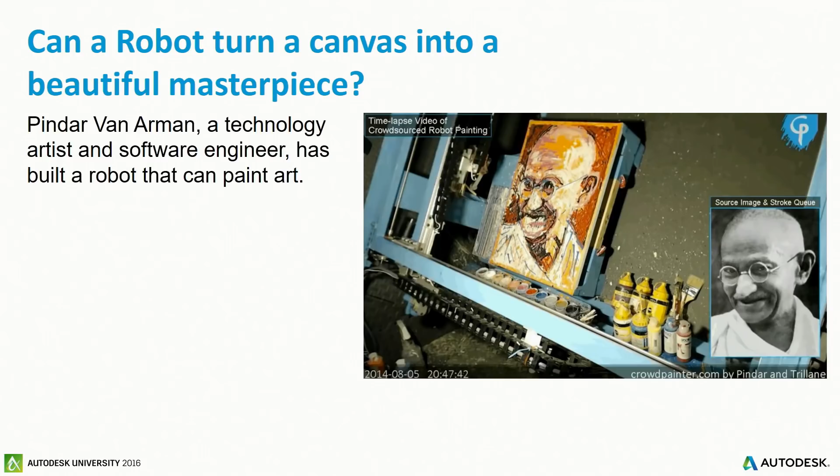So what I want to do, which hopefully you'll gain from this talk, is bridge the gap. I want to talk about where we've been, where we are, and where we're going. I'm not even going to go back into CAD—I'm just going to talk exclusively BIM.

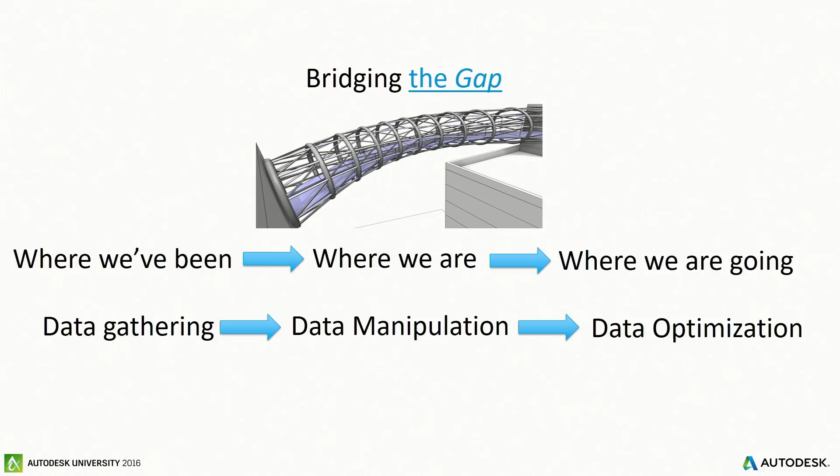So right now, where we've been is data gathering. Where we're at right now in this point in time is data manipulation. And where we're going to be going is data optimization. How do I know we're going there? It's already happening—there's already firms that are already starting to do this, the progressives, and it's just a few more years before it becomes mainstream.

So where have we been? Hunters and data gatherers—this is where largely our industry has been. Hunting, assessing the model, capturing data in schedules, kicking it out to Excel, manually remodeling it, going through this design iteration process with tools that I call static modeling. That's largely where we've been as a pulse in the industry. There's people doing more progressive things, but for the mainstream, that's pretty much where we're at.

So I can only design a few options within the timeline and budget allocated if I'm doing it as a human being. If I have to design a hospital and I'm given 4 to 6 weeks to do it for the design process, schematic design, I can only crank out so many options in that timeline through that process.

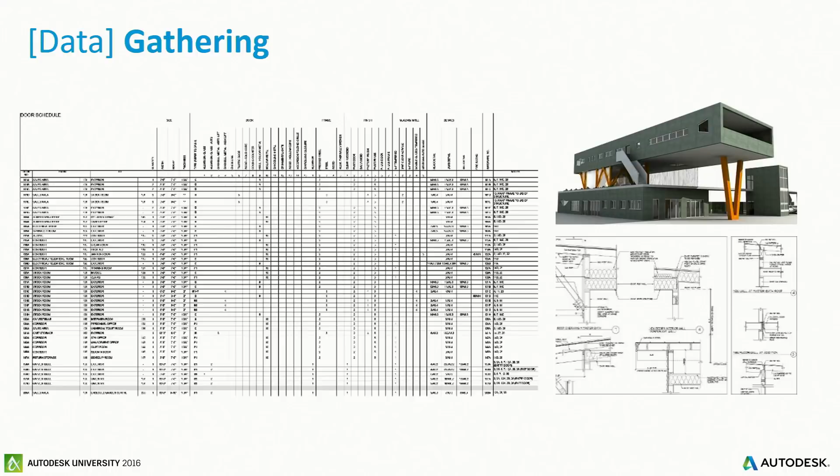As far as data gathering, we're mostly just grabbing the data from these models. Not to be cynical about some of the tools I'm seeing even today, but a lot of it is just in the cloud. It's like, well great, we're just repeating the same process of gathering data—now we're just doing it in the cloud, right?

So what I want to push is where I think we're going to be going, which I'll be talking about: static modeling versus parametricism and algorithmic modeling.

So we have a lot of these static modeling tools. This is one that we did in FormIt, and we started overlaying the idea of using Dynamo and Dynamo Studio, and some of those that you guys have been using with the FormIt.

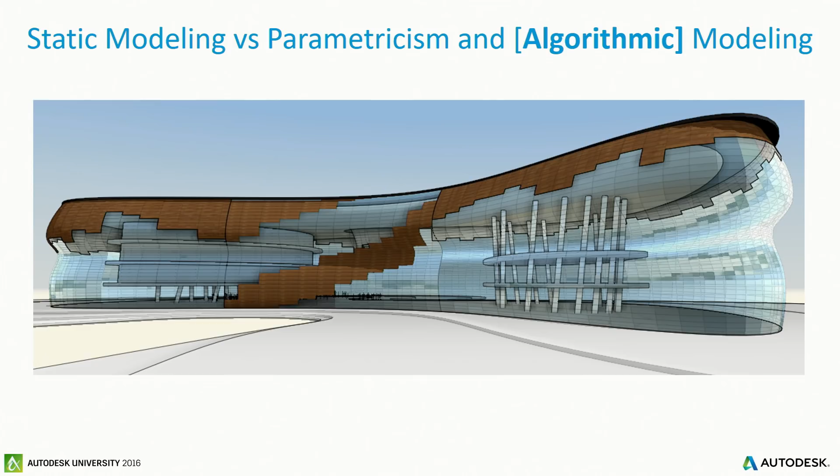The next step is what I'm calling co-creation, and maybe you guys have seen some of these too with some of the Redshift publications. This is basically the first—this is my own personal experience, a project I worked on, and the first hints of alluding to this co-creation process, or having data inform buildings.

In this one specifically, this was a Revit family that I had built, and I was using a bit of trigonometry, some formulas to rationalize these panels. The idea was trying to create these panels along a curved surface, and it was rational—all the same size—so that when we gave it to the fabricator, every piece, every panel was exactly the same size for efficiency of fabrication.

The challenge is it's rigid and not intuitive. I'm dealing with this formula that's not intuitive to edit or manipulate. The fact that I have to put trigonometry into the formula, or into the family itself, this is what leads to lack of adoption, in my opinion, in our industry, when you have to go through these hurdles.

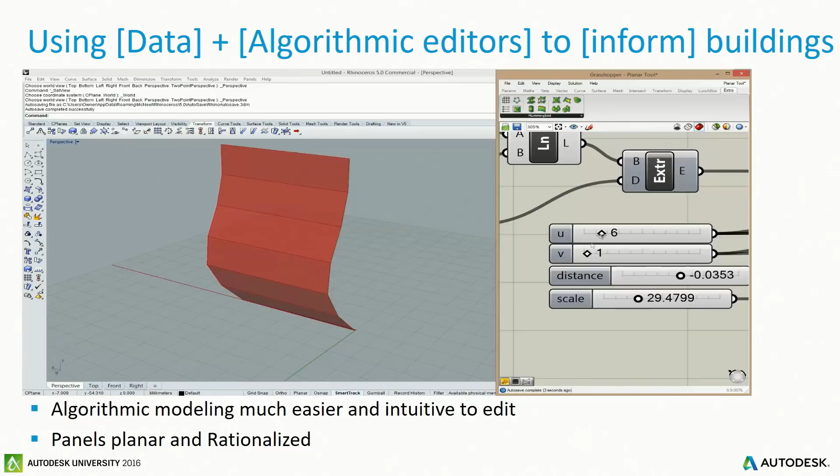The next example is doing the same thing, but when I started using algorithmic modeling with a tool like Grasshopper, I'm doing the exact same process, but using an algorithmic editor to rationalize the panels. You can see, very intuitive—I'm just moving the graph mappers, updating the geometry very intuitively, and not having to use any trigonometry. The program, in a sense, is doing that. So the intuitiveness helps with the adoption process.

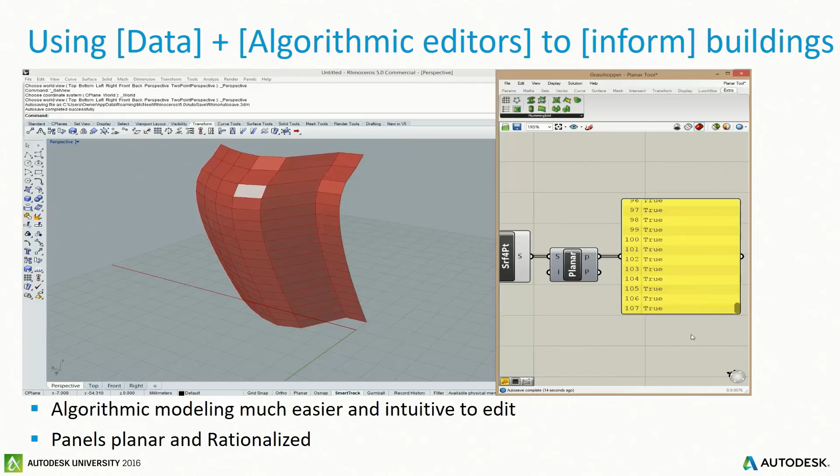The thing to note here is the panels are all planar. I'm doing a test to check: is this planar? Yes, true—every single one of these panels is 100% planar. It's very easy to get triangulated panels rationalized, but it's a much more difficult thing to do with squares and rectangles. So this is a good example of that—even with this intuitiveness, it's still 100% rational.

So Dynamo extends information modeling with a data and logic environment of a graphical algorithm editor. Many of you guys are already using Dynamo and understand this. It's basically just logic, hook up the nodes, accomplish what you want to do.

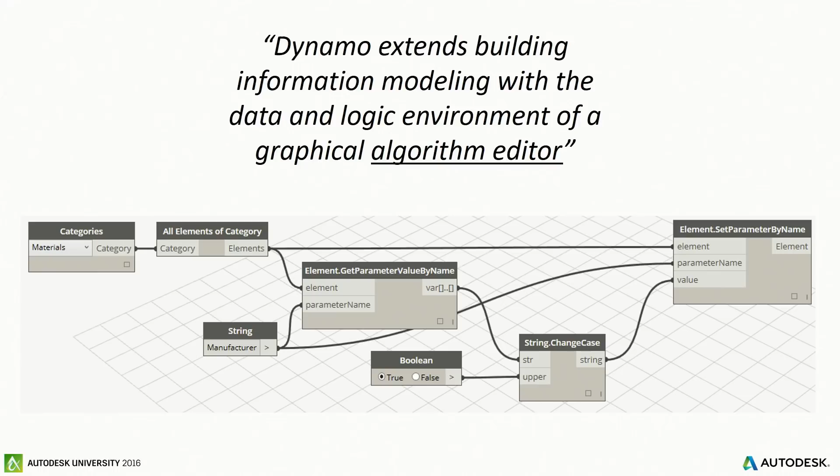So this next example is one that I did for BOMA calcs. I don't know if any of you guys have had to do BOMA. You cannot do it in Revit. Natively, it is impossible to do it in Revit. So the age we're in is the tool building age. If a tool does not exist and I can't do it in the program, I'm going to write a tool that can. Autodesk gives tools to us like Dynamo to overcome some of those challenges and limitations.

The running joke always is, we'll wait till release 2017 or 2018. Well, now as a designer, you're able to take those designs into your hands and actually create a tool to overcome some of those challenges.

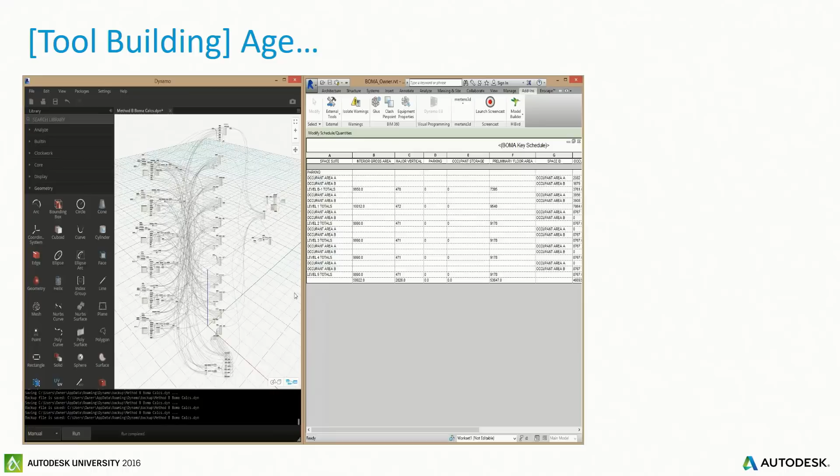So in this one specifically, what I did is, if you guys are familiar with the key schedule hack, you basically hijack a key schedule that you're never, ever going to use, i.e. if you're an architect, say you create a pipe insulation key schedule. When was the last time as an architect that you scheduled pipe insulation? Anybody? No? Okay, so then you take that, and then you can basically just put in dumb data into that key schedule.

So using the Dynamo scripting, I basically ran the algorithm of doing BOMA on building areas in Revit, and then I took the data from those, did the calculations, and then pushed it into a dumb key schedule for the purposes of just keeping all of the process within Revit, not having to kick it out to Excel or anything like that.

So static modeling versus algorithmic modeling. The one on the left is a SketchUp model that we had done, and the one on the right is a vehicular canopy that I had modeled. Basically what I'm doing is using Dynamo to edit the different beams that are associated to adaptive components and forms. It's starting to do parametricism and just ease of being able to model multiple iterations as a human using the slider bars.

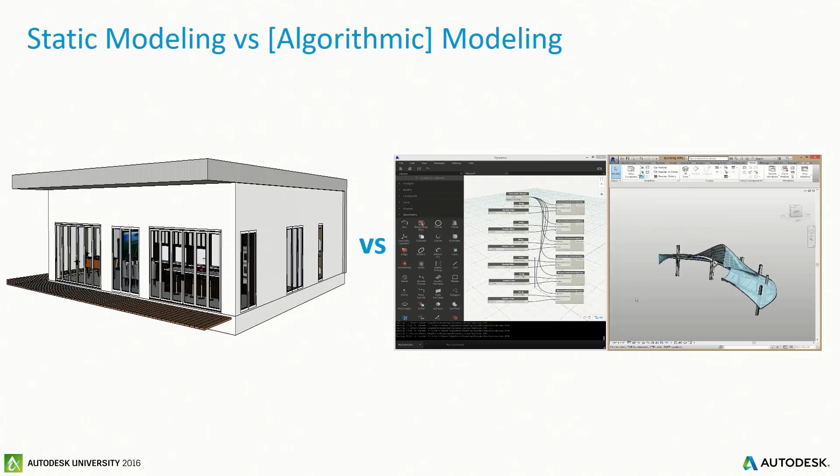The nice thing about this, of course, is that before, it would take a long time because I would model something and then I would have to remodel if I wanted a different design option. With tools like this, we're able to model multiple options more efficiently, right?

The other thing, and by the way, we're going to get more progressive. This is just kind of warming us up to kind of where we're at and kind of why I think we're going where we're going.

The other thing that we're going to talk about is computer-assisted craftsmanship. You guys have been seeing, I'm geeking out. Are you guys geeking out about like some of the robots and stuff that were in the exhibit hall? This is pretty cool. So this is an example of a project that I worked on.

It's basically a design after dark competition to raise money for a good cause. Basically, what we did is I used Rhino Grasshopper to create multiple iterations of this design. So you can think about if you're doing something with static modeling, much more difficult to create all these options. Definitely takes a long time, but we're able to create these options very efficiently.

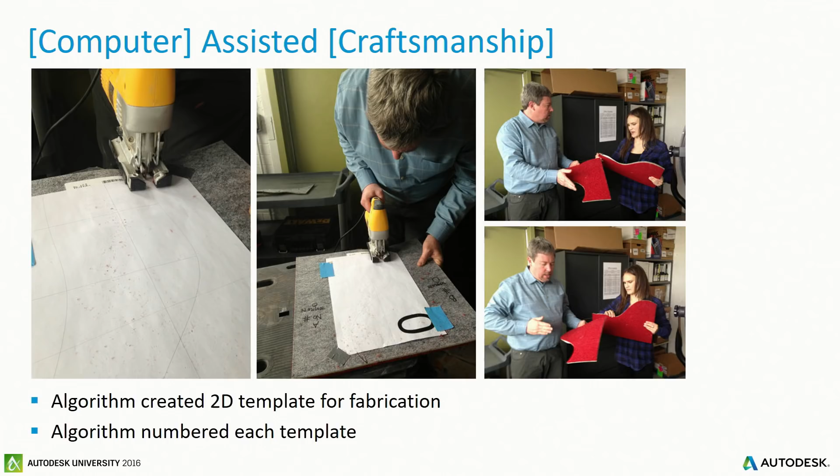And then what I did is I created a 2D template for fabrication. Super advanced process you can see here - human being just sawing that thing away. But what we did is we created this template, and the algorithm numbered every single carpet tile within there, and then we were able to cut those out for the finished product here.

So this is just one example of a mundane task that you might number these individually. It assigns it to the template. Nothing super progressive, but it is fulfilling that task.

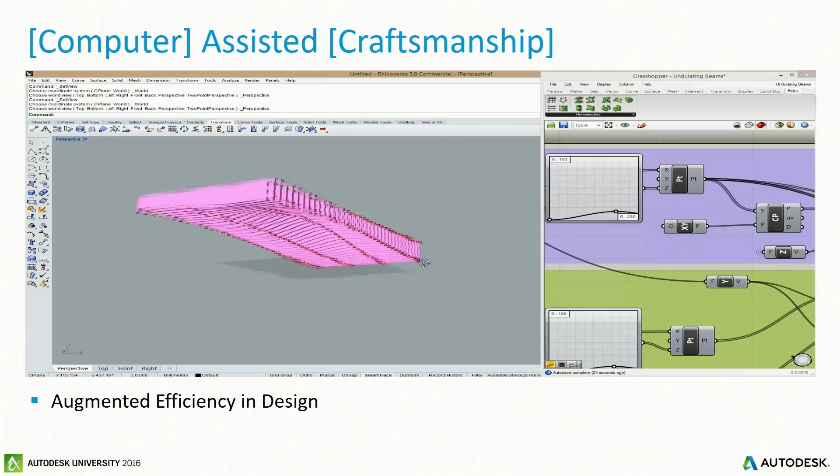Here's another example, this is a video so you can see. As I'm modifying this, I'm able to change the geometry in real time and crank out all these different design options based on moving the graph mapper. You can see the information updating instantly. So what I could do is take one of these, kick it out, take another one, kick it out, as a human. The next step, which we'll go into later in the talk, is having the computer create all these design iterations and give us the information back.

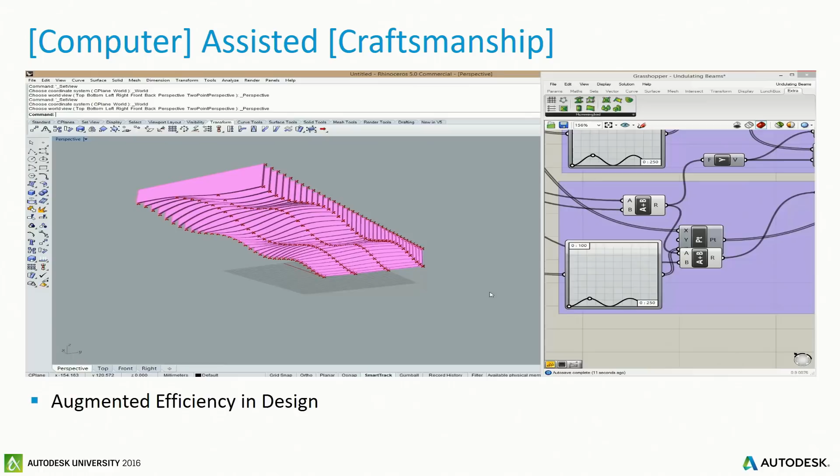This is building up, and this is why I'm calling it the bridge. I say bridge the gap between where we've been, this is where we are, this is the transition period of parametricism, computational design, whatever buzzword you want to use. Where we're going is the computer going through these different design options and giving us feedback on those.

When I did this one, one of the criticisms I received from a structural engineer was, well this is great, it sped up your design process, but think of the documentation. Every single one of these beams, you're going to have to document the radii, the tangent points, all this information to give to someone to fabricate. And I said, no. I'm going to give every one of these beams a unique number, and then we'll give it to the CNC fabricator, and they're going to go ahead and fabricate the beams.

So then we also augment the efficiency, not only in design, but in documentation as well.

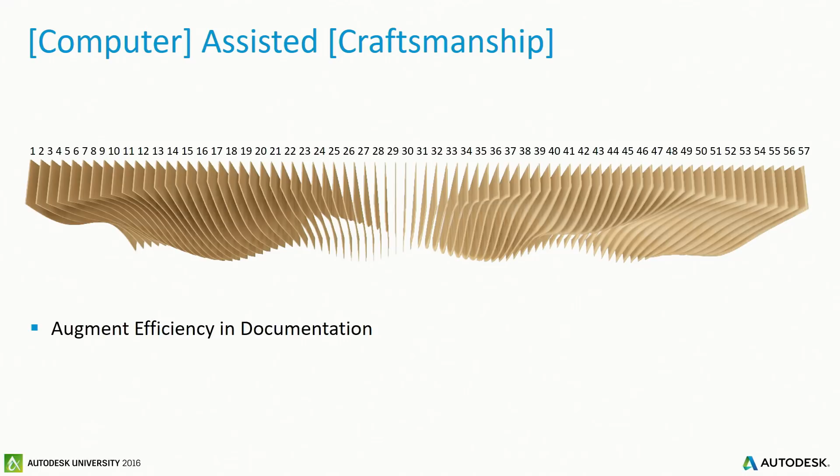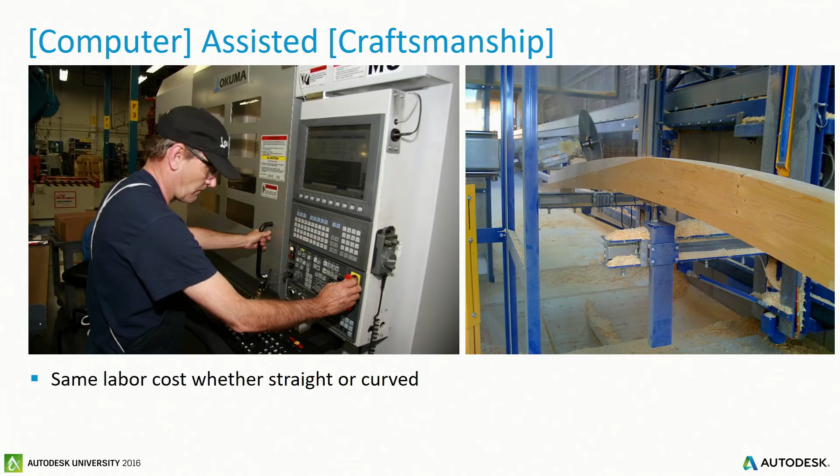So where it's going, you guys saw some of the robotics, CNC, computer-assisted fabrication. What's nice about some of these tools is it doesn't necessarily matter what the shape is, because you're not paying for human labor to follow the curve or follow a straight line. The computer, the robot, is going to cut those.

So what we're going to see is projects, like the earlier example I mentioned with the panels, had to be very rational, so everyone was the same, for fabrication cost efficiency. It's not going to matter in the future, and even now, honestly the future is now, where you're able to create these fabricated members, and the robot or CNC is just going to cut those, and it's going to be the same price as a regular one.

The other thing I think we're going to start seeing is greater interoperability, and I want to show you how that's already happening today.

Many of you are familiar with the term construction waste, basically the excess building material that's destroyed from a building. People are getting more into prefabrication and composite housing and composite buildings, but it's this idea of material waste. What I also talk about is data waste.

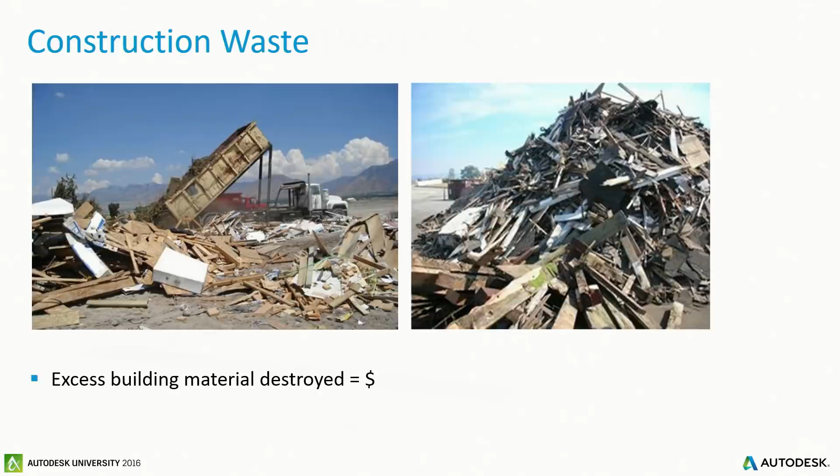We have this process that I firmly believe is an issue in our industry, data drops, data waste. What happens inevitably is you have your program area. Let's start at the very beginning. You've done your space program in a tool like Excel, most likely there are other programming tools, say you're using Excel.

How many times do we see it? We go by a coworker's desk, here's Excel on one monitor and Revit on the other monitor, and they're manually trying to coordinate the programmed area in that Excel document with their design. So the idea is, now you're having to recreate that data. Why not just push the data into Revit? You can get your affinities, departmental adjacencies, programmed area, actual area. You can take all the information in Excel, push it into Revit, and overcome that data waste. In its most simple example, that's one.

We talked about parametricism. What I want to talk about now is basically the idea of taking information from one design tool and publishing it into another tool. There are a lot of people already doing this, tools like Hummingbird and Flux that have already come out.

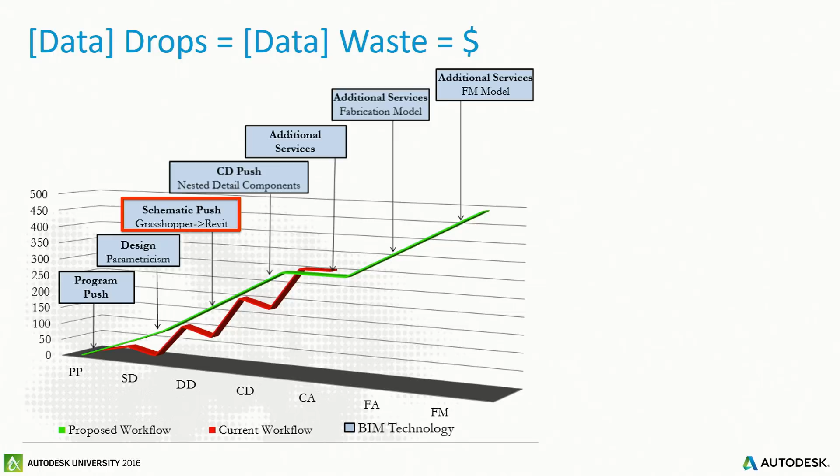This is an example of something I was doing as a proof of concept a couple years ago. The idea was to create a parametric building—you can see it's an office building. Here I'm getting real-time feedback on programmed area, or actual area.

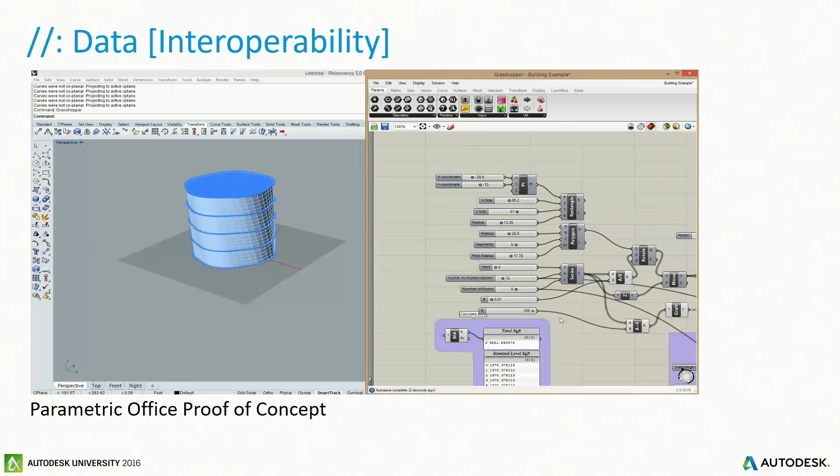Total square feet per level. I'm able to change the number of floors, and I could change the building footprint, with the square footage updating accordingly.

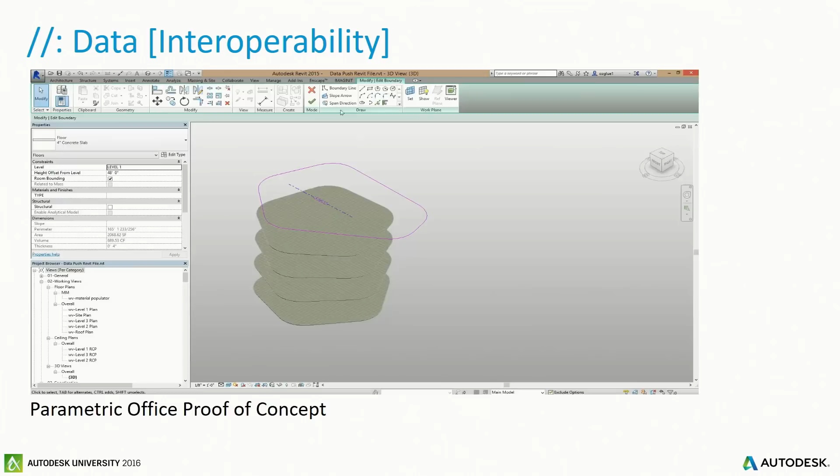I can push this information into Revit using the add-in Hummingbird. What I want you guys to pay attention to here is that this is a real Revit floor. There are different interoperability tools that convert a mass from one tool to a mass in Revit.

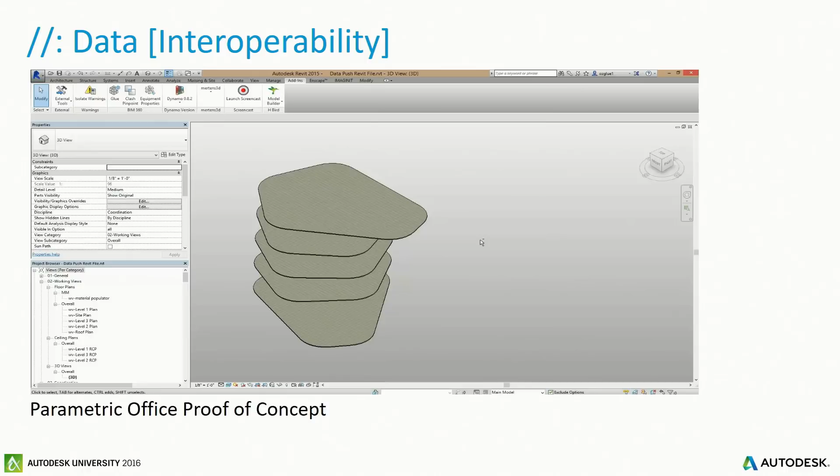That's great, but you're still going to have to recreate those systems in Revit—you'll still have to recreate the wall, still have to recreate the floor. Here, we're able to actually create real Revit systems within Revit using this interoperability tool between the two programs.

The other thing we're mitigating is data waste—the idea that you have to model something in one tool as a designer and then remodel it is going to go away. Interoperability is going to be vastly improved in the next year, because it's already happening.

Here's another example, a real project up in Breckenridge that I worked on—a facade. We tried to create this facade that emulated the mountains in Breckenridge, using the algorithm editor Grasshopper to do this.

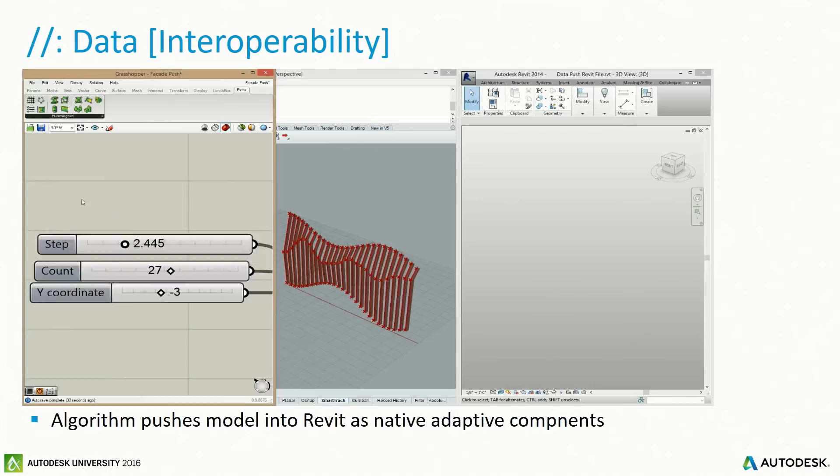Here's an example of it parametrically updating. You can see I'm updating the count, I'm able to take the graph mapper, and I'm able to update the midpoints.

And very efficiently—if you had to model this as a static thing, it would take a very long time to create all these different design iterations. So here's all the different design iterations.

Then I'm going to publish that to Revit, again using the add-in Hummingbird, and here I'm able to create real Revit stuff.

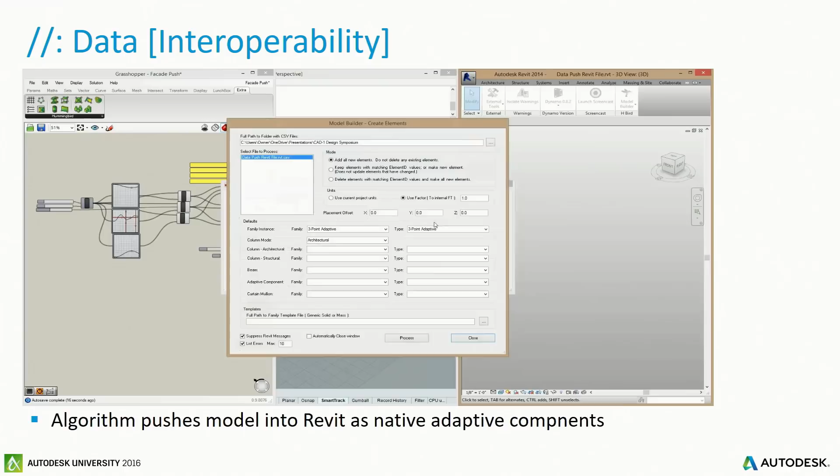This is going to be a Revit adaptive component, recreating everything on the right that is on the left. So I'm avoiding and mitigating the data drop from the design side into the production side, and saving time in the process.

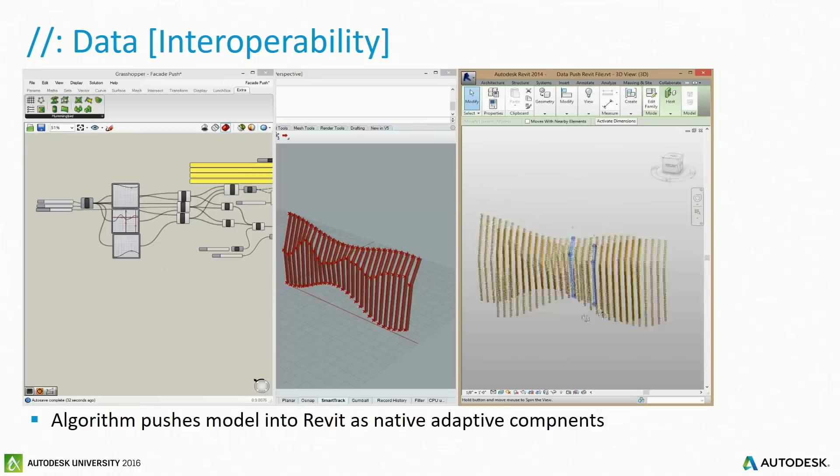So where are we going now? This is the next step—this is AI BIM, as I'm calling it. The idea is that you're not only going to have these parametric pieces, but there's going to be computer logic, algorithmic thinking behind that, feeding the parametric modeling moving forward.

Really, where we're going is algorithmic optimization—we're going to be optimizing these buildings moving forward. So in the very, very near future, we're going to have this integrated team: the designer and the computer.

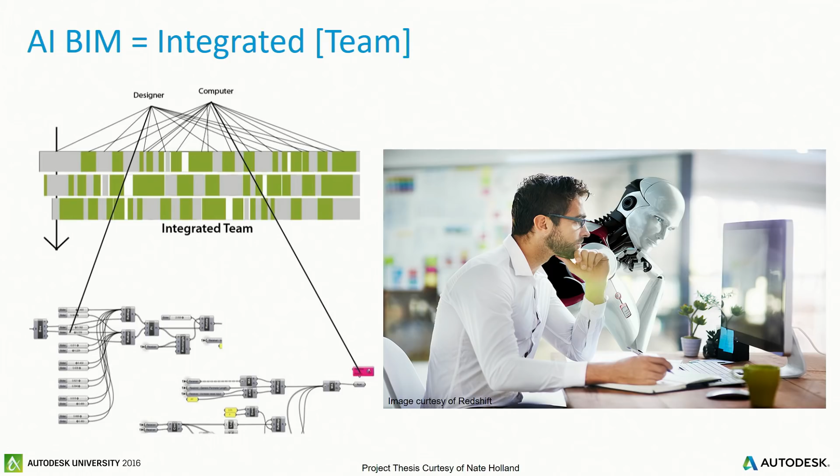I want to give kudos to my good friend Nate Holland—this was part of his project thesis. Just so you know, this is like a five-year-old thing, so it's nothing new; he was so ahead of this, and we're just kind of catching up as an industry. Like I said, it takes a while for us to become mainstream. But I want to give credit to Nate for this—he did a really good job.

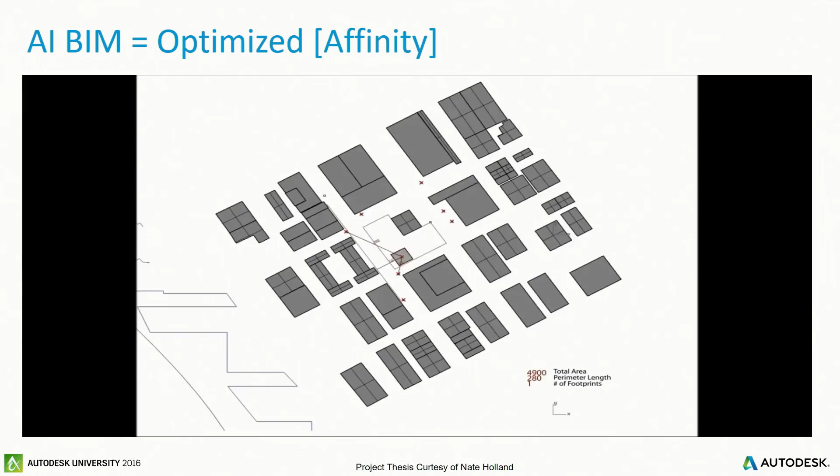This was a project he worked on, around the idea of an integrated team—the designer and the computer. In his presentation, he talks about using Galapagos, an optimization algorithm in Grasshopper, to find the affinities, the optimized locations for real estate—developers, viewpoints to the ocean, retail, all of that—with the algorithm processing all the information based on the rules he fed it.

Then he has this override feature that lets him manipulate the geometry based on where he wants to use it—so this integrated team involves both the computer as well as the designer.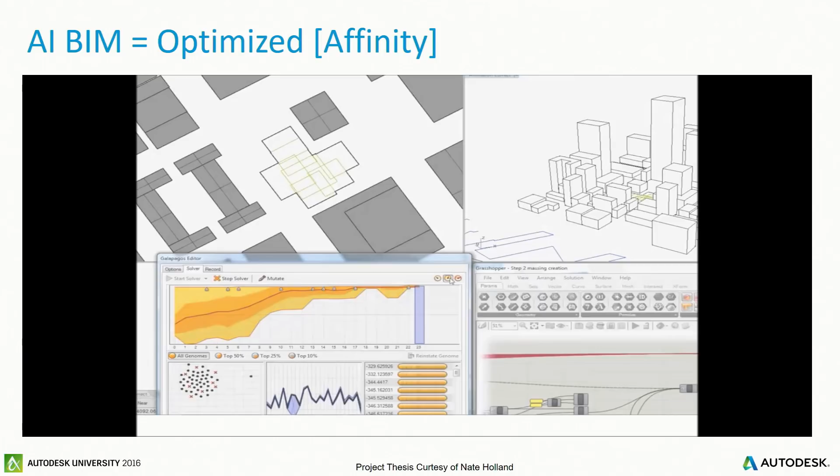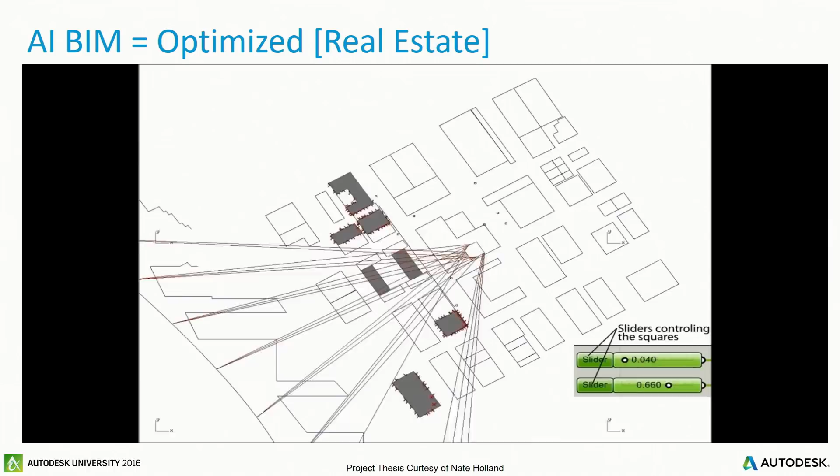So in here, he's able to also then, from a floor-by-floor, see sight to waterfront, so you can see the lines as they're connecting with the points. It's giving the program real-time feedback, and he's able to go through all these different design iterations. Think of you as a human being if you had to go through every design iteration and try to figure out the viewpoint to these oceans. He's able to do that using the algorithm, so optimized for retail, optimized for views.

And then there's another one, optimized for views as well. So it just kind of goes through, and based on where that floor plate exists, you have these different floor plates, and every floor is optimized based on its location geospatially.

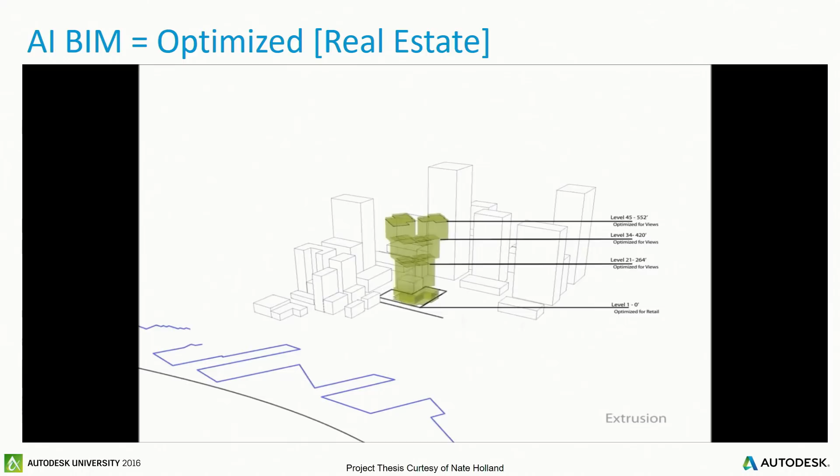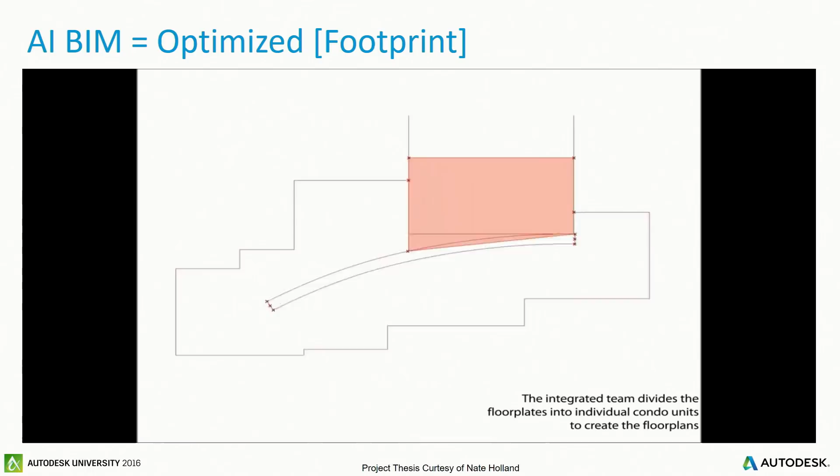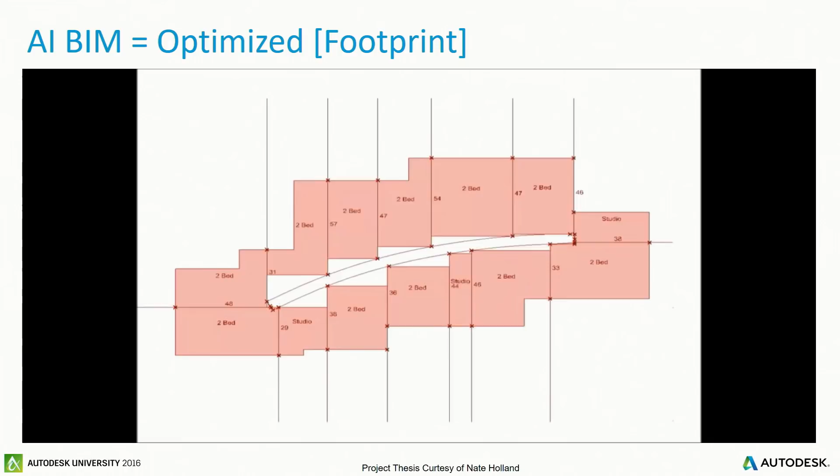Not only that, it's starting to lay out floor plans. So we looked at per floor, but now the computer is actually starting to lay out that floor plan and space out whether it's a studio or a 2-bedroom, using the programmatic information and the requirements, and is able to tweak and optimize them based on their location and the information being fed back. And again here, individually, kind of per space.

So it is possible. We've been hearing about the idea of generative design for a while now, the last couple of years, but there are people that are able to do this. In this example, as I was talking about earlier, you saw how I was kind of manually updating this information. Here he was actually able to kick out every single one of these options, and here's the data supporting the optimal solution for whatever rules he fed the computer.

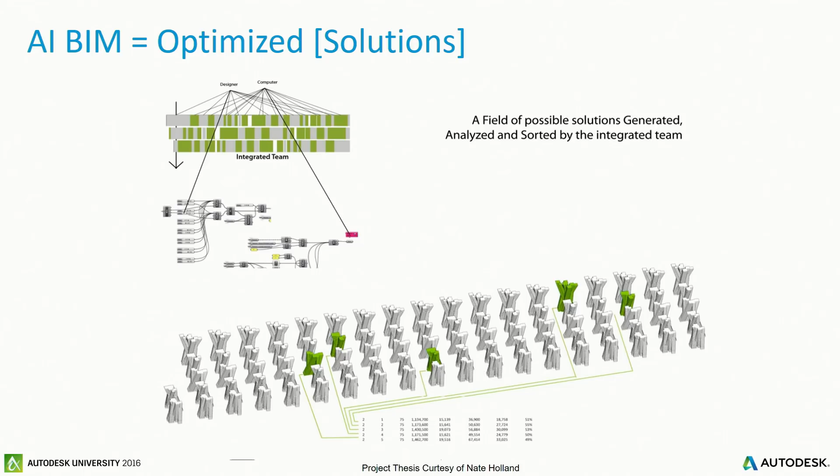And then in here, there's cost that outweighs benefit, and benefit that outweighs cost, and here's the information, the data. So you're actually able to not just say, well, this looks good, but to take data and have that inform the design and our decisions moving forward as a designer.

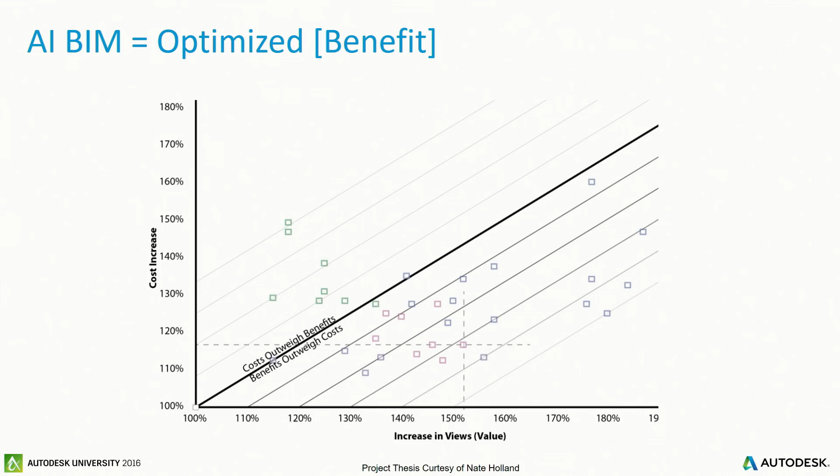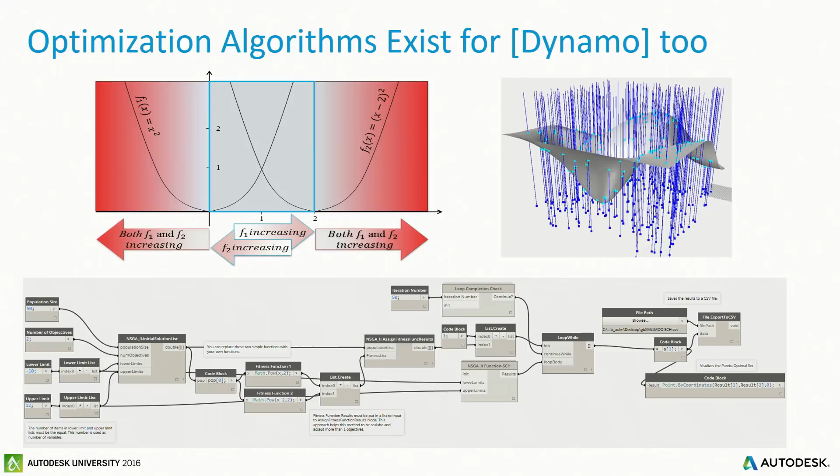So this is a Grasshopper example. What about Dynamo? Dynamo actually has some optimization algorithms. There's one that came out, I think about 2 years ago, called Optimo, and that one works well for Dynamo too. If you want to try to accomplish similar tasks, kind of like Galapagos was for Grasshopper, Optimo is a tool that lets you do similar kinds of tasks.

Okay, so the problem with algorithmic modeling is intuitiveness, or lack thereof. This is my personal opinion. I feel like we have all these awesome tools at our disposal, but we're kind of ad hoc piecemealing these things together because nothing exists yet that allows us to accomplish this, right? And so the problem, in my opinion, is the intuitiveness of it.

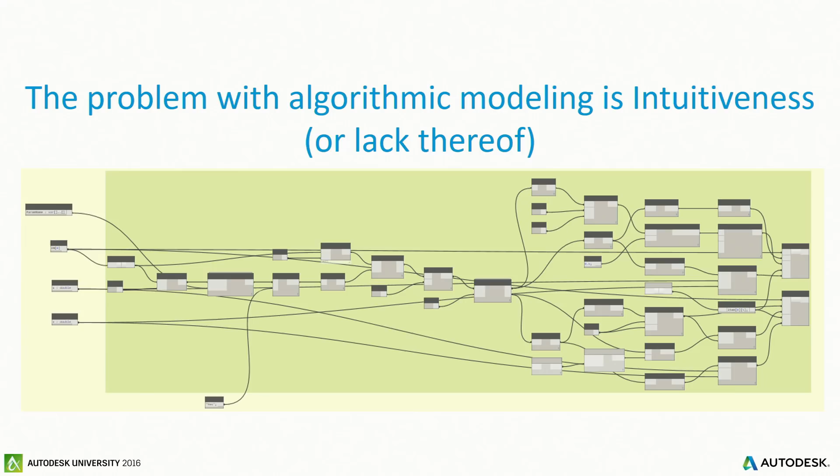So there are some of you that are like me, that geek out and love Dynamo and can do this stuff, but if you gave it to the designer in your firm, they're going to go, no thanks, I'm going to use SketchUp, right? Yes, I'm getting a lot of head nods, okay? Or I'm going to use FormIt, or whatever design tool they're comfortable with. Again, interoperability is going to help us overcome some of those issues, so it's not going to matter as much. But what we're going to see in the next couple of years is this becoming more intuitive.

So as an example, some of you have heard about Project Fractal. It's an Autodesk product, and what it does is option engineering, using Dynamo basically to feed the UI. But this is the UI, much more intuitive, not a big spaghetti mess, right? So for designers, this is a little bit more intuitive to be able to pick which options they want.

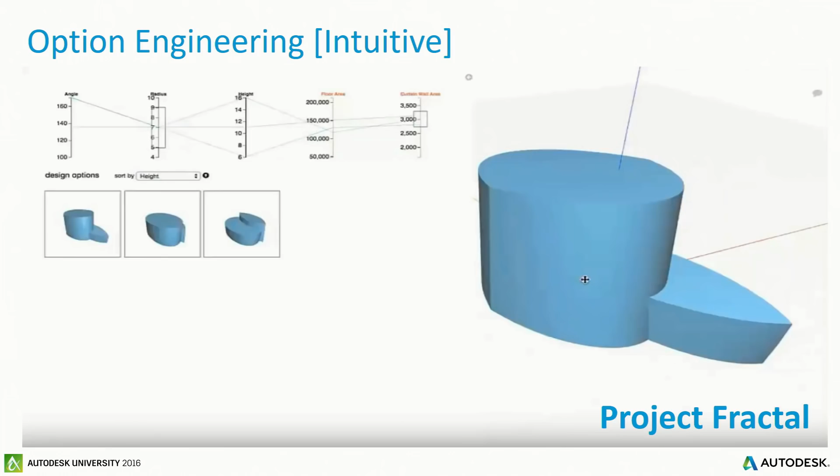And you can see based on height, floor plate, radius, etc., you can change these different, I don't know if you call them sliders, but you can change these and it updates and gives you an output for those different options. Look at all the options we were able to create in a couple seconds here. There's some logic and stuff going on under the hood with Dynamo, but you're able to create all these design options extremely efficiently. What about stadiums?

So think about the seat count and the field of view and all this information. You can feed this into the model, and I can quickly create many, many options based on the information that I'm feeding the program. And you can see in here I'm able to create all these different options based on the sliders, the data that's pushing it.

And then from there, we can kick these out. We can get data from them, feed them to the owner, and say, here's the top 5. What are you thinking?

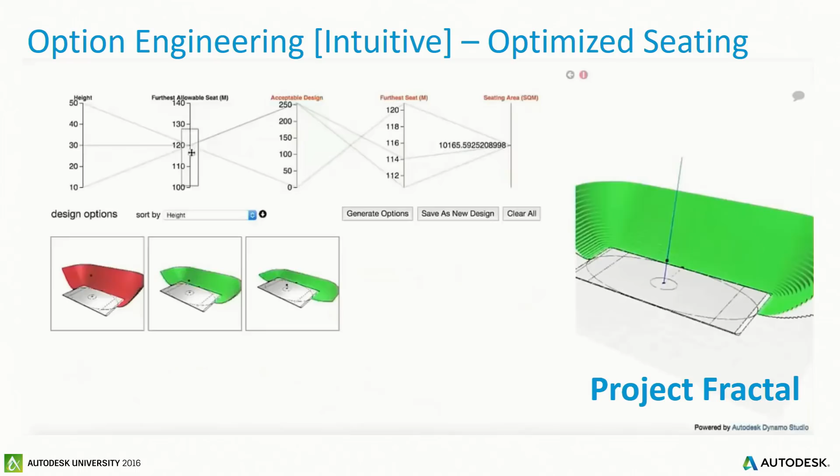And this one I just saw today, I just added it today. It was in the exhibit hall. I don't know if you guys saw this. It's like, oh my gosh, it's here today. So I just added this. It was pretty freaking cool.

Here's the space planning for this project. There's tools that Autodesk is talking about, Dreamweaver and some of this generative design. It's taking the information, creates the different space plans, and gives you the data.

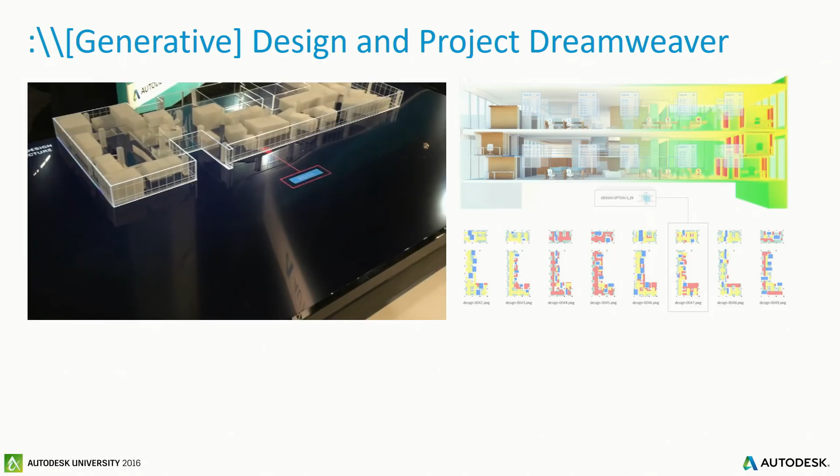Did anybody see this in the exhibit hall today? A couple hands, go check that out. I thought it was pretty cool. So in here, here's all the data associated to those design options. And then they have a physical model, which is kind of cool to support it.

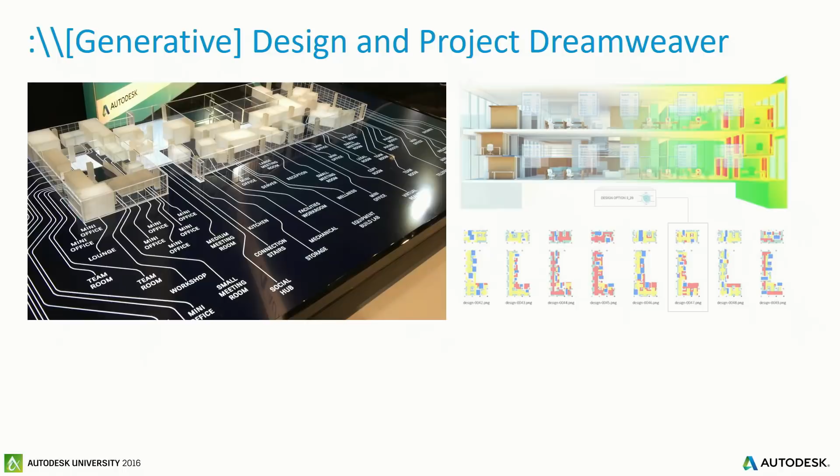I can't tell you how excited I am right now to be alive. The things that are coming out, is this not freaking cool? We're so fortunate as humans to be able to live in this time. It's pretty cool, okay.

The other thing I think we're going to see is computers take over mundane tasks that you have to do as a human all the time. Printing - who loves printing? Who loves going through on Friday, it's 1 o'clock, I got to get the PDF set out for my consultants, I got to get my models detached, I got to get my CAD exports.

I don't know if you guys have heard of Clarity. I've been using Clarity for a while now. It's basically AI BIM for task automation. Maybe it's pushing it a little far, but it's pretty cool. If you have a set of CAD backgrounds that you're kicking out to your landscape or civil crew every Friday, or you're detaching Revit models, or creating these PDFs, Clarity is actually able to automate that process. So at 1 o'clock in the morning, a computer fires up in the office and creates your PDF set. You just set up these tasks and you're able to save so much time and money.

Just as an example, I did an assessment on the firm I was working with, and we said, okay, how many hours does the staff spend printing? How much time does the staff spend creating these exports? Assign a billable rate to that, and it's around $500,000 per year. And granted, you are still going to manually print sometimes, you're still going to manually create some of these CAD exports, but let's say even if you tempered it by 50%, it's still $250,000 of time savings.

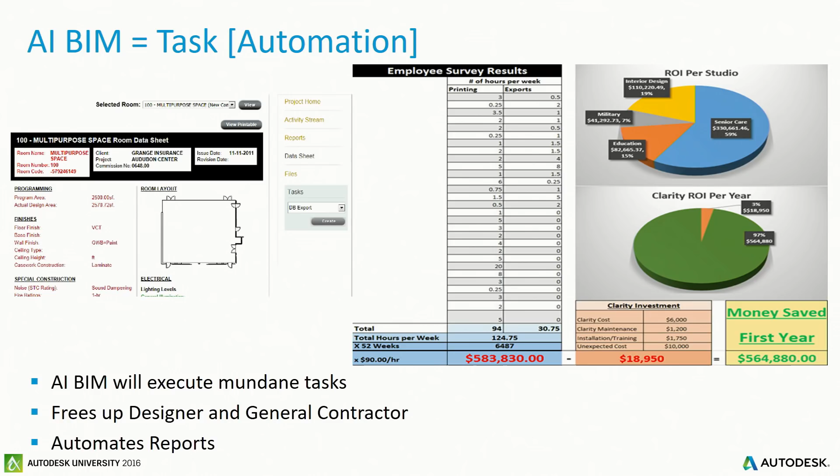I was working with a colleague of mine, and I showed him how this worked. I said okay, so we set it up, we ran the task. Here's your room data sheet, kicked out an 8.5 by 11 of the room, has the wall perimeter, the doors. The computer did this, it created this PDF, and it had all the data that was in the Revit model. It's a good 500-page PDF, with every room cropped. And he's like, oh my gosh, this is awesome. And I'm like, yeah, but if you want, you could probably just continue manually printing all those individual rooms and cropping them. He's like, no way. This is at our disposal to be able to save so much time on mundane tasks.

So computers are going to start taking over and doing more of that as well. This is another one that we did at EvolveLAB, basically auto-creating these rooms. It was a Dynamo exercise. Let me make sure this is going. There we go. So you pick which rooms you want to elevate, and then you run the Dynamo script.

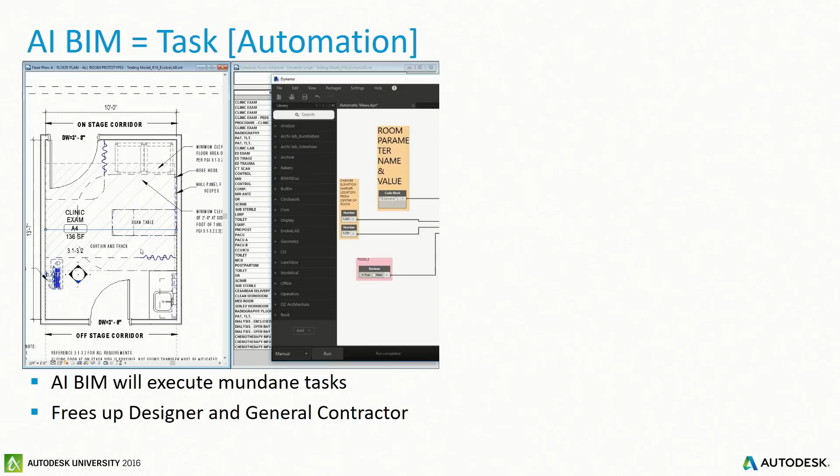Pay real careful attention, it's kind of small and hard to see, but you'll see these little rooms pop up in elevation. Boom, real tiny. Here it dropped in an elevation in every single room for this project.

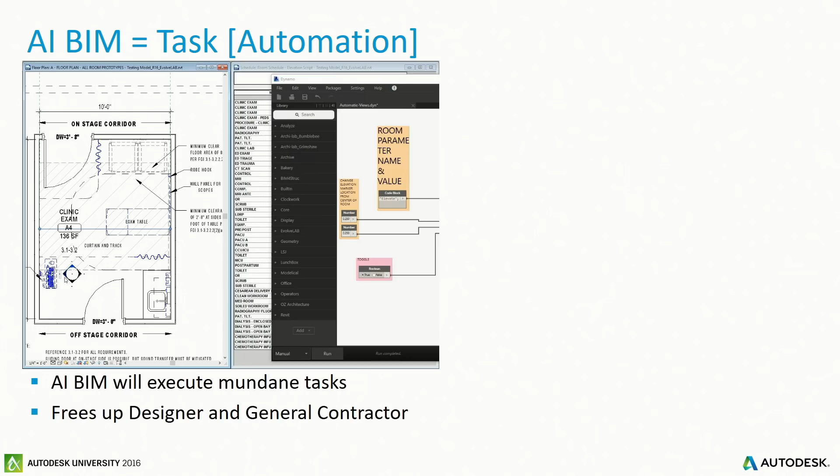You could pre-populate this. Think of the typical rooms you're always doing, right? Kitchens, bathrooms, those are the rooms you're elevating. So as part of your programmatic requirement, you could include that so you don't lose the data drop. Include it in your Excel spreadsheet. These are rooms, this is the room type.

Push that into Revit, run the script, and it will auto-elevate every single one of those rooms. So you're not manually dropping in an elevation and elevating it. It's going to aggregate that efficiency for documentation as well.

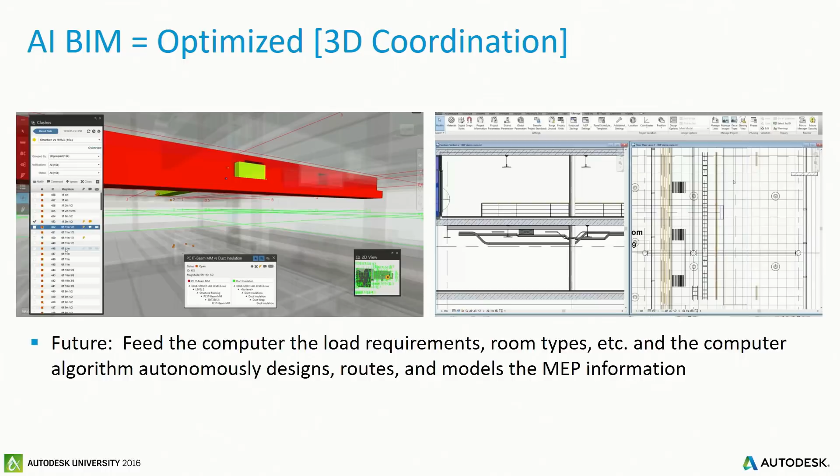The other thing I want to give kudos to, these guys are Building Systems Planning, their Gen MEP tool. Check this out, it auto routes based on information. Here's the beam, and what it does is automatically miss those beams as they're routing it. That's pretty freaking cool, I'm geeking out about this. It's starting to become like object awareness, and the information is being fed based on the routing preferences and where information exists.

In the future, with this tool there's still some picking. You're picking on different things and telling it where to go, depending on how much you want to let the computer do versus how much you want to do yourself. But I think what you'll see is you'll be able to send the computer your room types, load capacities, thermal performance, and it will auto-route this information based on what you feed it.

The other one is Graitec, Advanced BIM design. They created a tool that automates analysis, so manual analysis and modeling is going away. They created a tool that does the analysis for your 3D cage reinforcement. It's design-driven reinforcement that does the calculations - Autodesk Revit structure does some of this as well. But it automates the documentation and production of the reinforced concrete columns, beams, and footings.

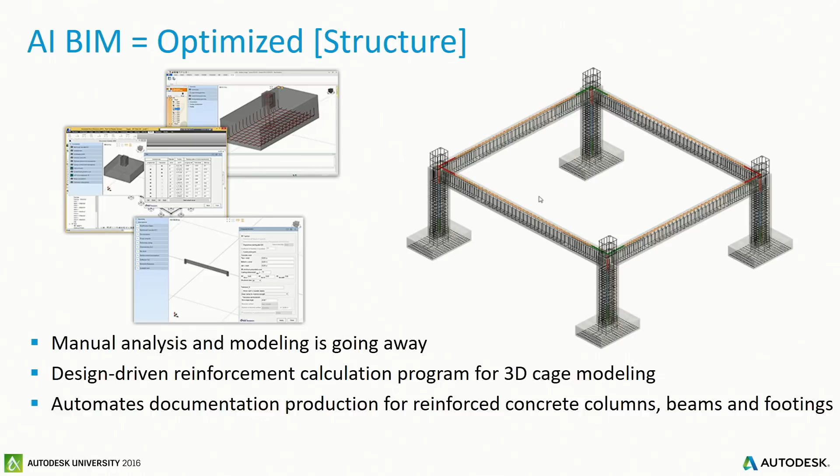We did this too for another client, this auto sectioning and elevation. It's really cool - no longer are we going through the model cutting sections and dropping elevations manually. We'll just run the algorithm, and it's going to auto-elevate, auto-section, and document it for us.

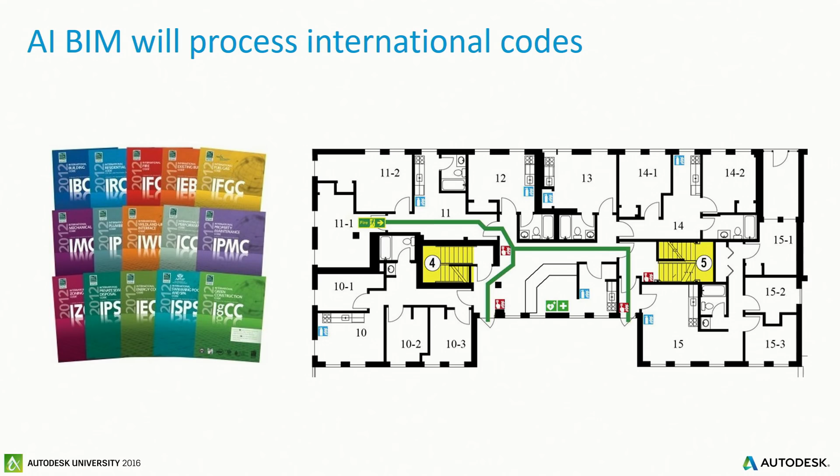The other thing that's important that I don't want to lose sight of is code. There's still code requirements, so if you just let a computer go nuts, it's going to design some things that are not code compliant. I think if you're able to feed the computer the set of rules, the IBC data, egress paths, things like that, it's able to make sure that it does not exceed that egress.

The other thing we're going to see is daylighting optimization, and we saw some of this earlier today in the keynote. We'll be able to send the computer the rules, and it'll kick back 1,400 different options - here's the optimal daylighting, the top 20, your optimal daylighting model based on what you fed it. Then from there you could pick which one is best, and you'll have all of the data in there.

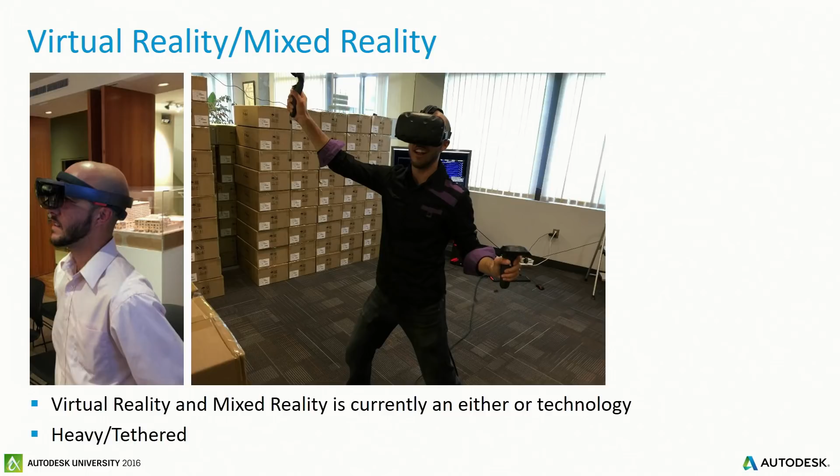You can't talk about the future without talking about virtual reality and augmented reality. It's been here for about a year or so, and it's starting to catch up as people adopt it. The problem is it's heavy, it's clunky, it's tethered. Putting this on, this is me, by the way, like a little space trooper swinging these around. It's this kind of bulky, awkward thing. People are saying there's no way they'll sit in a cubicle with this thing sweating on their forehead for 8 hours. So that's the challenge with some of these.

But I think in the future we'll have one pair of glasses that can support either AR or VR. It won't be mutually exclusive, so you won't have to pick between the HoloLens or the HTC Vive. You'll have a set of glasses, and you'll either do your augmented or mixed reality, or if you want VR, it'll frost over like we have with glass, and this stuff will disappear, giving you that virtual reality environment with one pair of glasses. They'll be light and comfortable.

Okay, so now I want to transition into robotics and construction. How will robots drastically change the construction industry?

We've seen 3D printers, right? These cute little boxes that sit in your office and print models. Did you ever think about 3D printing a road? This company, GSX, has a road printer. You can see the humans feeding the blocks. I don't think it would take much to find colors and have a robot put those bricks in the specified location, feed it through, and print a 3D road.

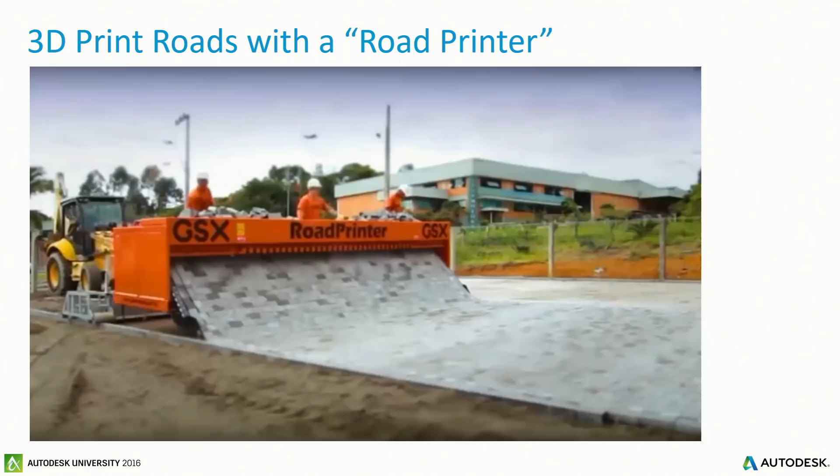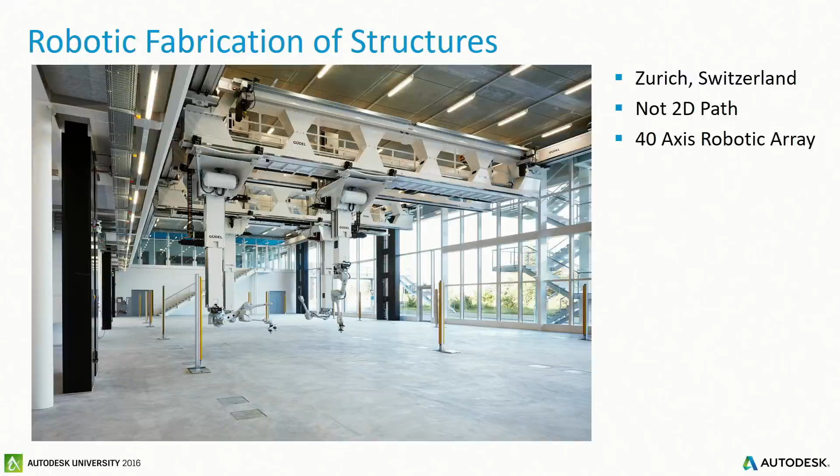The other thing we'll see is fabrication of structures. In Zurich, Switzerland, they designed this facility with swing arms. Think of auto manufacturing, with an assembly line where the car is fed through, one robot does this, another does that, moving through a linear process. I think we'll see these arms - this one specifically has a 40-axis array, like the ones we saw in the exhibit hall earlier - used the same way, with robotic arms assembling complex buildings. It's going to help with that process.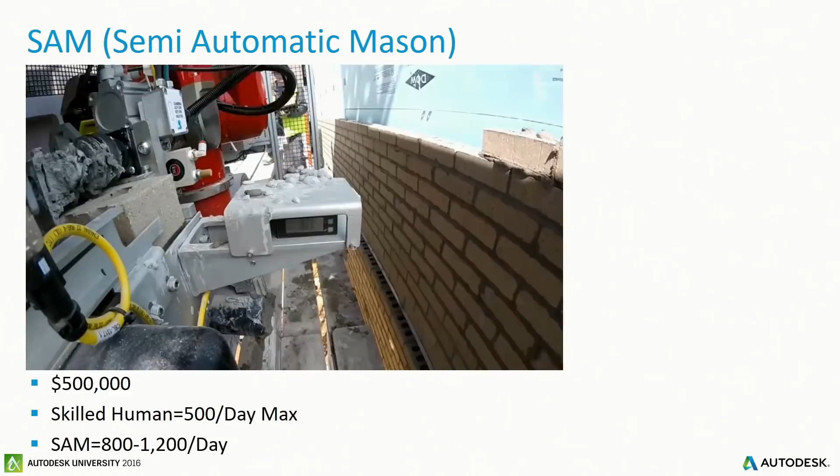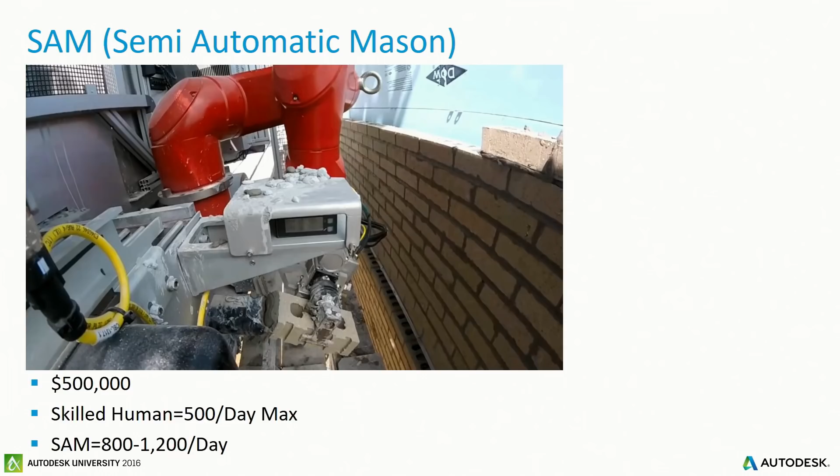And the reason is efficiency. Here's a semi-automatic mason, Sam, which costs $500,000. A skilled human can lay 500 bricks max a day, but Sam can do 800 to 1,200 bricks per day. This is where it starts to become pragmatic - when you do your ROI and figure how long it takes a mason to assemble bricks and mortar, it starts becoming efficient and cost-effective, making sense for dollars and cents.

To take another step further, Fastbrick Robotics has designed Hadrian, which does 1,000 bricks an hour. It has its own custom grout, and it's able to lay those 1,000 bricks per hour.

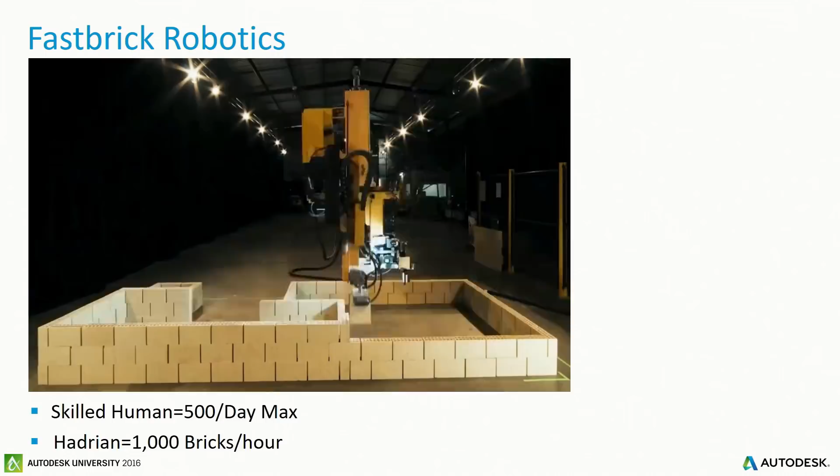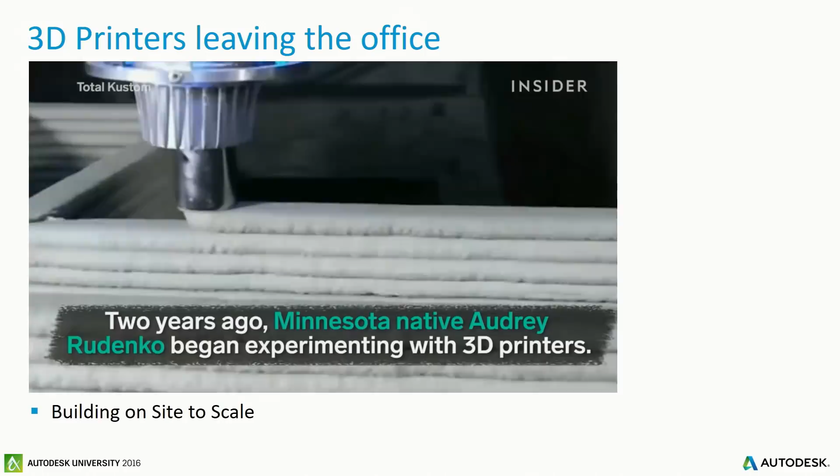3D printers will be leaving the office. I don't know if you guys get these Facebook feeds - I saw this one and thought, oh my gosh, I've got to include this. 3D printers are leaving the office and will start building structures outside at real scale. So this is an example.

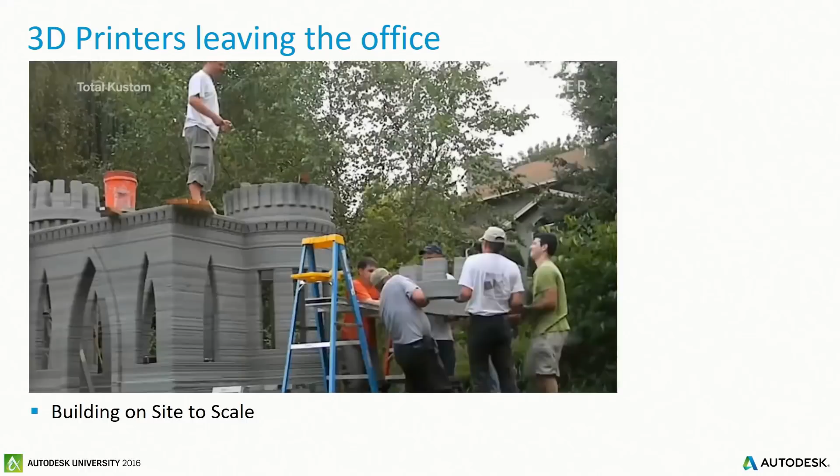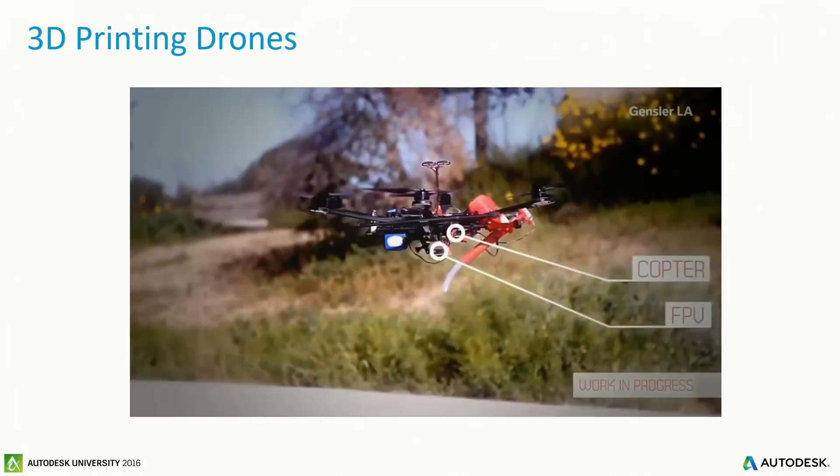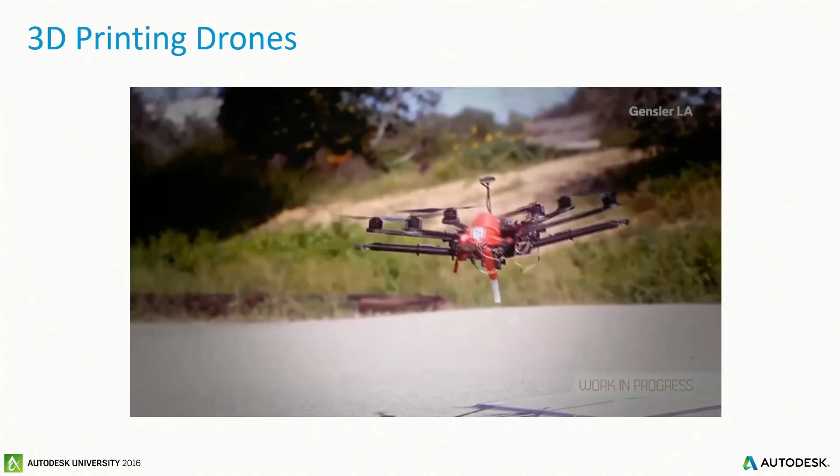Don't know how pragmatic this is yet - 3D printing drones. Gensler has this work in progress, a 3D printing drone with a laser rangefinder, GPS coordinates, and a printer. There are challenges: battery life of the drones, weight capacity of concrete on a drone. But I think it's pretty cool what they're trying. I almost wonder if you could use a hose instead, so the drone isn't carrying full capacity but acts as a transitional device transferring the concrete materials to the spot. That might work better, but it's cool what they're doing, or at least trying to do.

The Internet of Things. We're going to see some pretty cool stuff happening with objects—cars are already doing it, it's coming. So it's just a matter of time before cranes, SAM the semi-automatic mason, does this too. It's just a matter of time before the construction site is filled with these objects that are aware of themselves.

Internet of Things is the internetworking of physical devices, vehicles—also referred to as connected devices or smart devices—buildings, and other items embedded with electronics, software, sensors, actuators, and network connectivity that enable these objects to collect and exchange data.

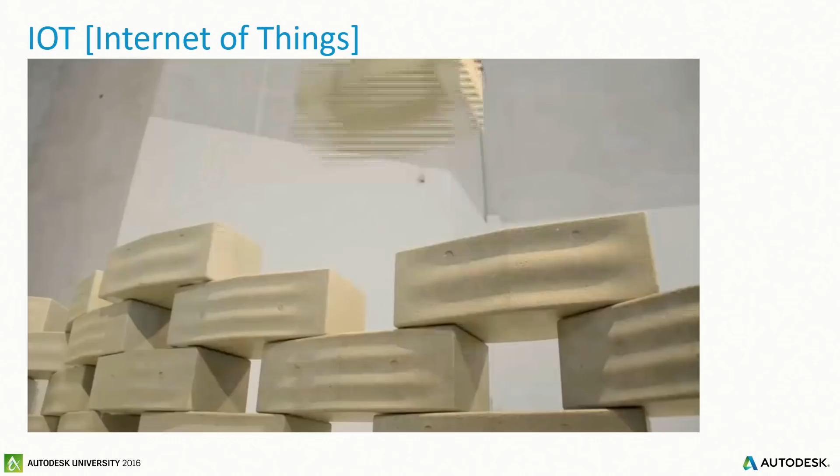So here's an example. Architect Ammar Mirjan programmed a small collection of drones to fly hundreds of these blocks into formation to build a 6-meter tall tower. This was a first for drones. So you can see it's already starting to happen—it is coming.

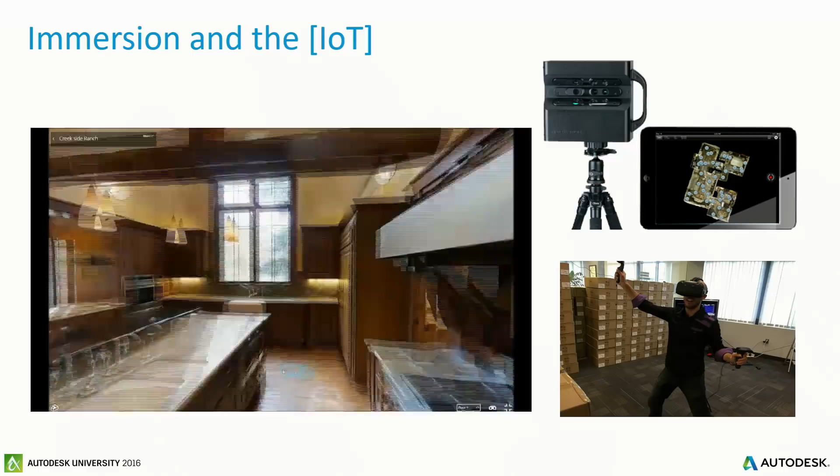And they're totally aware of themselves. Immersion—we do this 3D scanning with our camera, and what's pretty cool is you're able to create these 3D models from photos. It stitches all of the photos together. I believe we're going to see a huge overlap between photogrammetry and immersion.

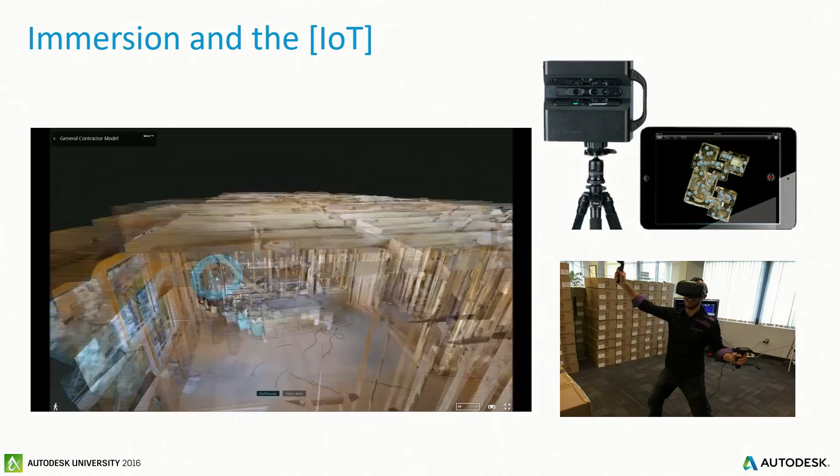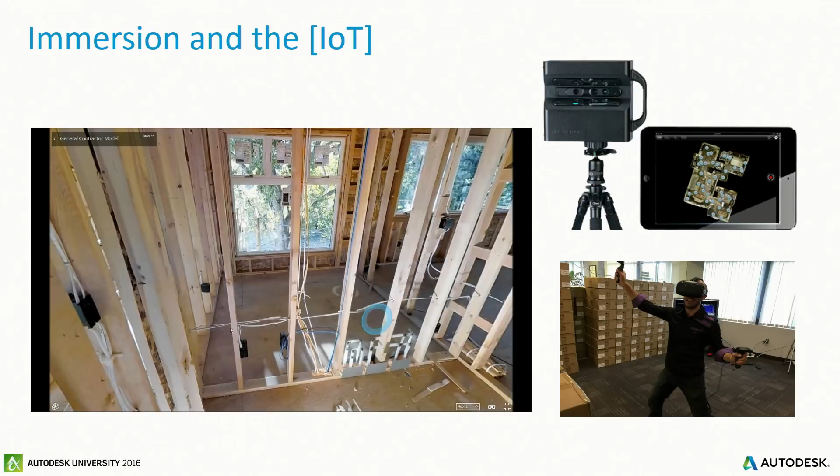This is a construction example from one of the general contractors. They wanted to understand where all the piping, electrical, and everything else was before they drywalled the project. You can see through here, I'm able to view all this information—the electrical conduit. The process they used before to communicate was with their smartphone: they'd go out to the site, take thousands of pictures, then go back to the office and try to remember where each picture was taken.

They were like, well, we need to do something better, maybe we'll do video. So we have this floor outlet down here—let's look at the video to see what it shows. The outlet's down here, let's check it out. Okay, the video... oh yeah, it just looked at the ceiling. Totally missed the outlet, it wasn't working.

So this process of being able to scan the project and have this 3D model using this technology—you're able to have this immersive environment and experience it, and it catches everything.

So inevitably whenever I talk about this, this is where it goes: with all this automation, what will we do? Other people are talking about this too. I don't know if you caught the NPR special, but Martin Ford wrote a book called The Rise of the Robots: Technology and the Threat of a Jobless Future.

In his talk, he discusses fast food workers, writers, legal professionals. Nowadays, if you want to become incorporated as a company, you don't need to go to a lawyer—you just go to rocketlawyer.com, download the document, and it's done. There are websites, algorithms, and robotics that will be putting a lot of these people out of jobs. So the question is: what about architects, contractors, fabricators?